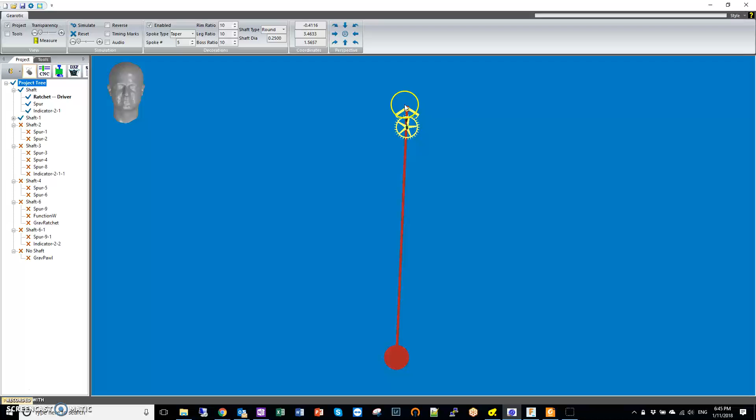So what you see now is the escapement and the pendulum. It's going to be a grandfather's clock where it goes tick, tack, tick, tack, like every second. It's going to make a tick or a tack.

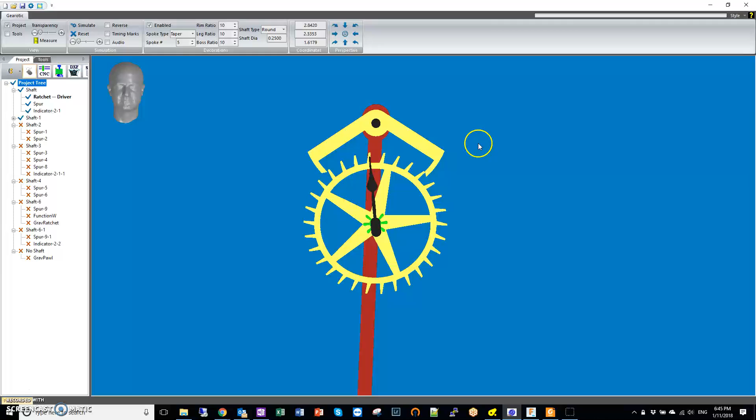So what makes the tick or the tack is when the pendulum swings, it's this escapement here. I'm going to do a little bit of a simulation. Here's the tick, and a little bit later, you're going to see the tack. As the pendulum swings the other way, here's the tack.

There's something else that needs to be considered here. Of course this would stop unless there was additional energy pushing the pendulum back and forth. What's doing that, I'm going to zoom in right here, is right at this moment. The wheel is actually turning and it's pushing that little lever right there up, and the same thing the other way around. Just at this moment, it's pushing this up, and it's this little push that gives the pendulum back and forth that is actually going to keep the pendulum going.

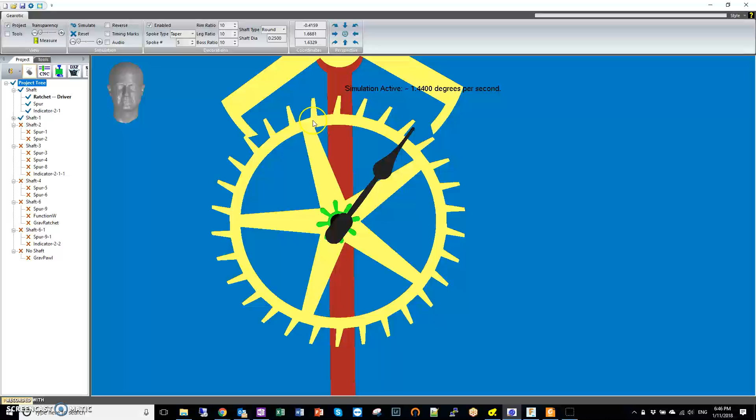What is doing this is going to be a weight somewhere in there, and as the weight is pulling down, it's actually being reduced, but eventually this gear right here, or this ratchet, is actually trying to escape and apply some force to the right. All right, so that's the basic principle, and I'll show you a bit later.

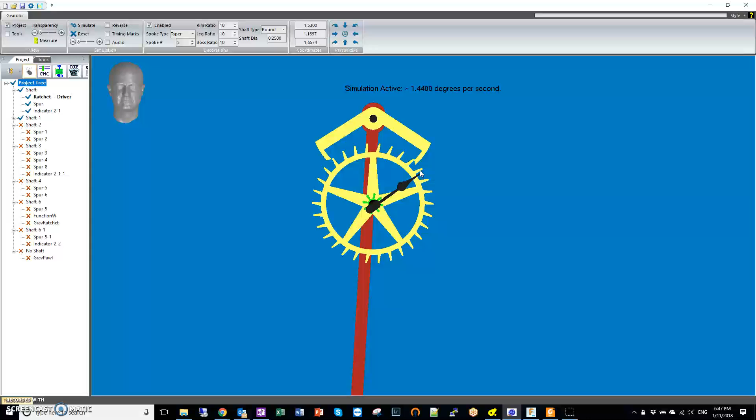So there's nothing new there. Let me show you. So far, what you see here is a tick and a tack every second. The little indicator here is actually moving, that's the second hand, right? So it's going to do a full rotation every 60 seconds.

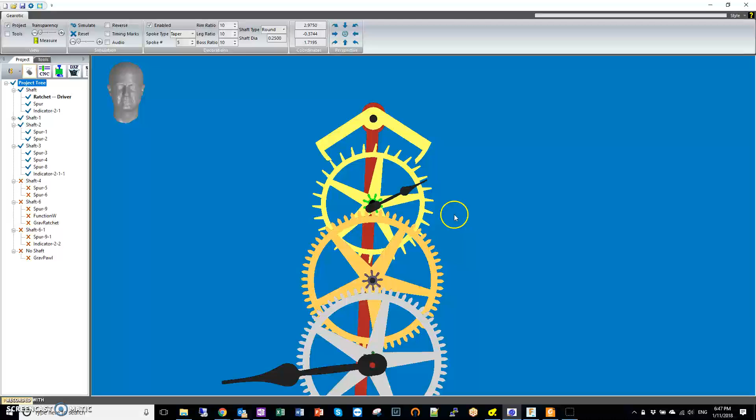Now let me show you how I get the minute hand, and it's basically by doing a reduction with 2 sets of gears, an 864 and an 860 right here, and what you see right there is the minute hand.

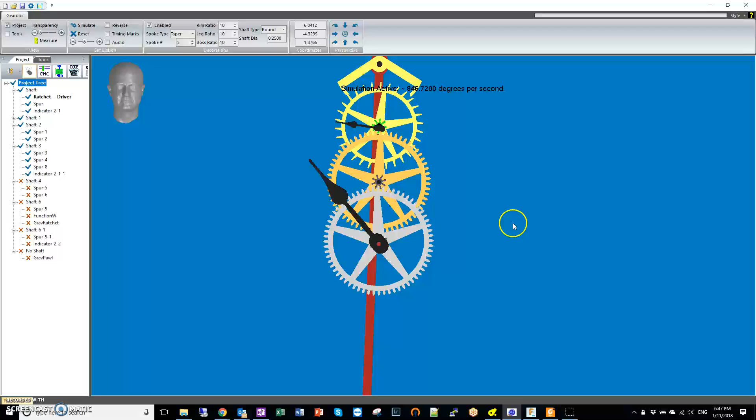So I'm going to accelerate the simulation so that you can see how it's going. I'm going to make it a lot faster. There you go. So there's a minute, 2 minutes, 3 minutes, and as you can see, the minute hand is moving accordingly. Okay, so that's what we see so far.

And how do I get the hour hand? I'm going to stop this. So I'm going to show you that. Not this guy, but this one right here, and this is what you see.

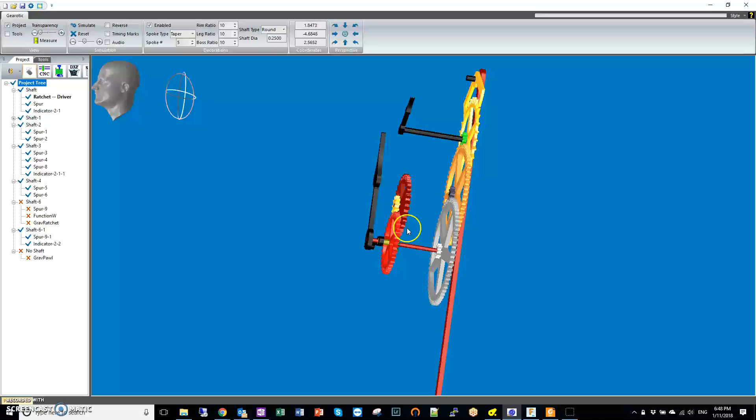Further up front here, you see a set of gears, and these gears are designed to divide this motion by 12. So every 12 rotations of the minute hand, there's going to be 1 rotation of the hour hand.

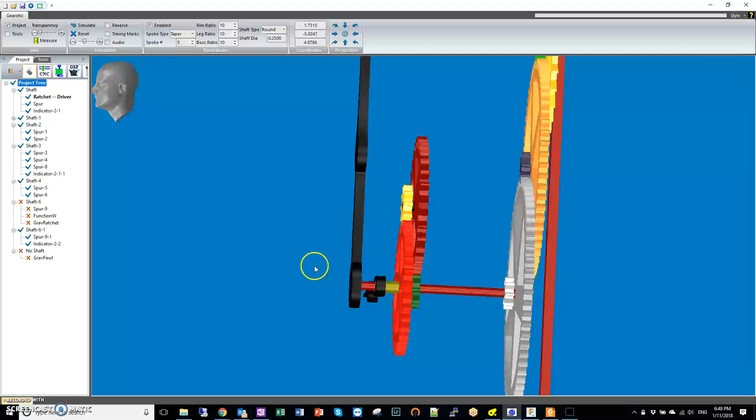One thing that will be challenging when I make this is they are concentric, and you can see that this is the wheel, the gray one here, that's actually driving the red shaft that's moving the minute hand. The minute hand is held on the red shaft, whereas the concentric tube that slides on top of this is going to be tied to this red wheel, and that's going to be driving the hour shaft.

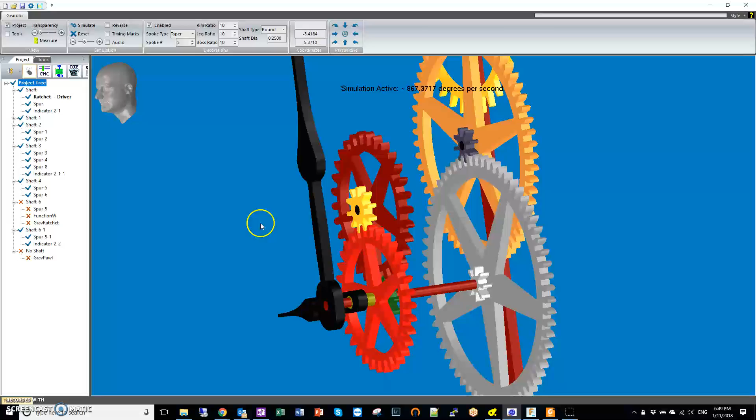So I'm going to show you this. Alright, there you go, and we'll move and accelerate this. There you go, and that's what you see. So the hour hand is moving.

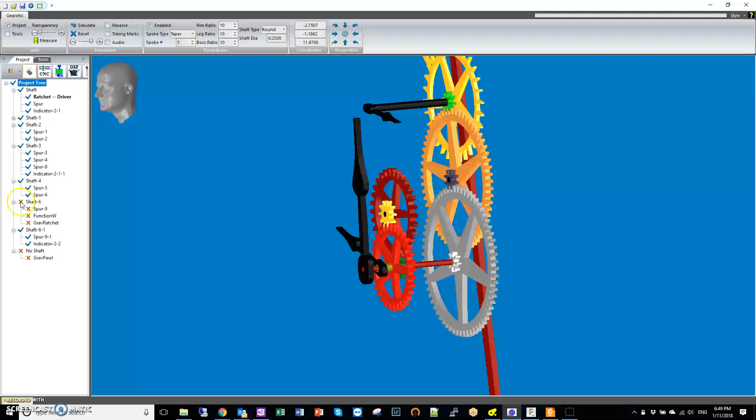So the next step I want to show you is that weight that's going to go down and pull on all these gears, and that's what you're going to see right here. There's an additional wheel, and this wheel here is going to make a turn every 8 hours. I wish it could be 12, but I cannot make a gear any bigger than 5 inches, so I'm going to have to settle for 8.

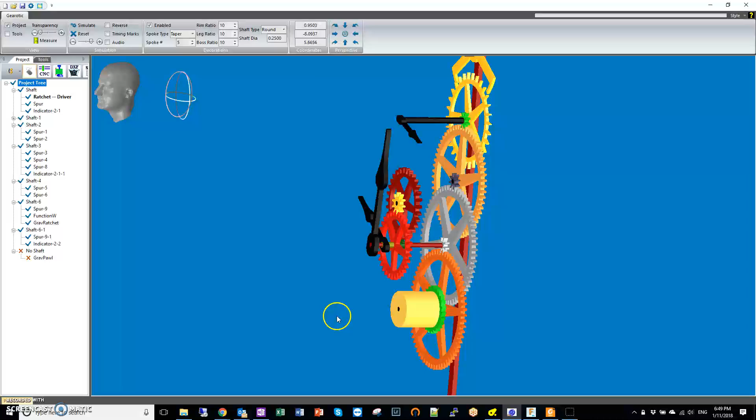Wrapped around the cylinder here is going to be a string with a weight, and that weight is going to be pulling down, and it's that pull-down that actually activates and generates the energy. It's a ratchet system, designed so that you can wind it back up by turning this cylinder, using a key.

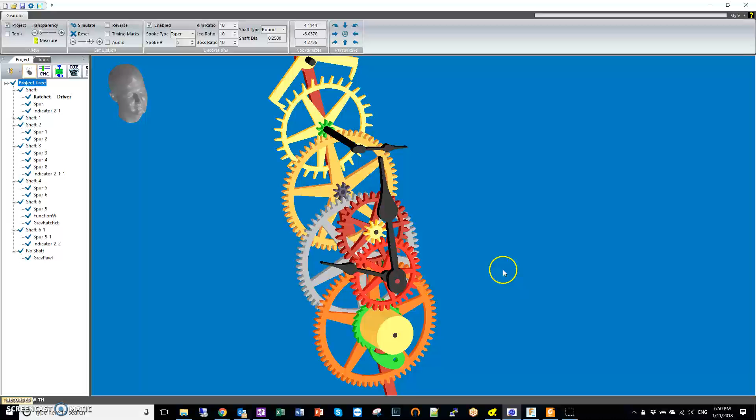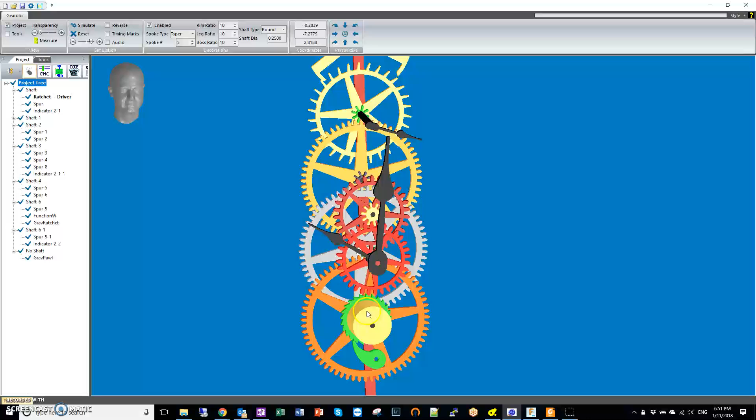37 inches. So the weight is going to be hanging here, and it's going to drop down. When you wind it back up, it's going to have this ratchet, and there'll be a little spring attached here, and the ratchet is actually going to be attached to that spoke right there. So that's the counterweight system right there.

There was one additional feature — so far everything's pretty standard. The additional feature I couldn't figure out how to do just dawned on me: how am I going to do this? Right now, if I try to adjust the time and force-turn the minute hand right here, and I try to turn it, well, I'd be breaking down the gears.

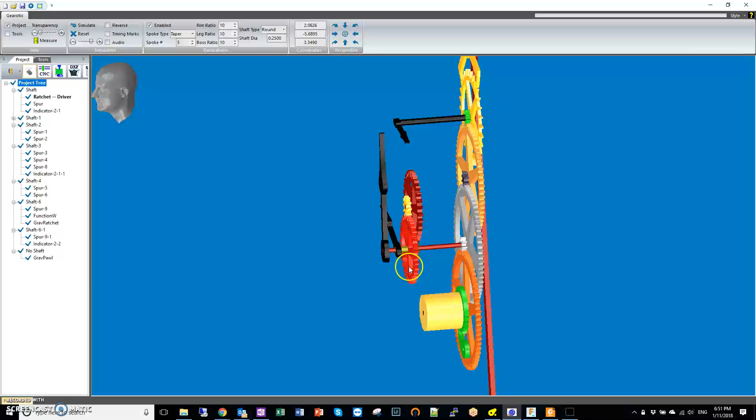The gears are not going to want to turn if I try to push this. So what I was looking at is, how can I make it like a standard grandfather's clock, where you turn the minute wheel and it just turns and actually activates the hour hand as well. So how am I going to adjust the time?

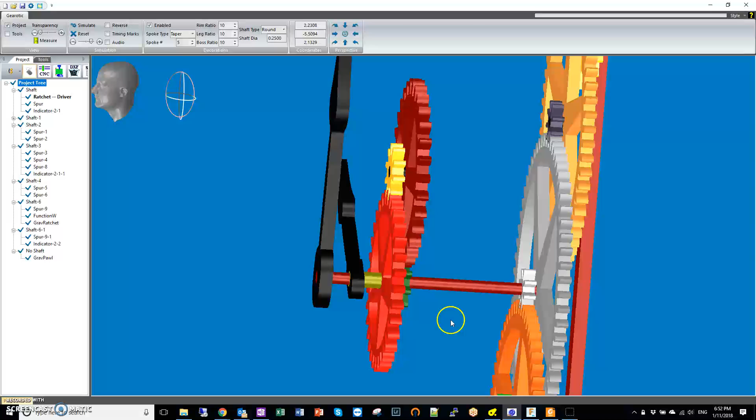I figured that I needed a clutch mechanism or something, where if I turned this it would activate all these gears right here, but not the back gears that are actually driving this shaft right there. So I figured I needed some kind of clutch somewhere along this shaft, so that I could disconnect this shaft — if you want, the motion works in the front versus all the gears in the back — so that I could actually force this.

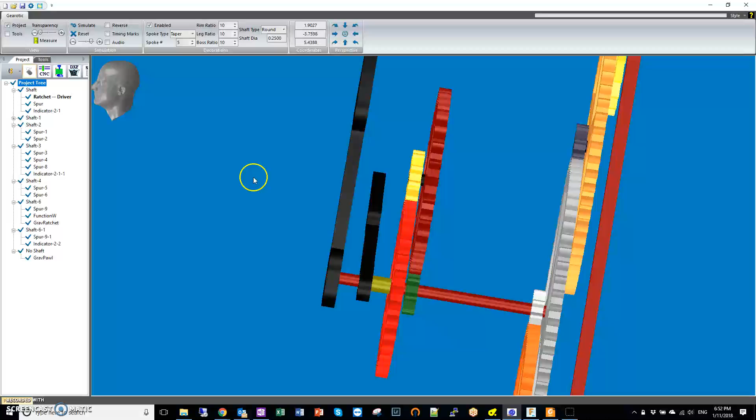So I figured, how am I going to make a clutch here? That's the next step I'm going to show you. So I went to Fusion 360 — actually did it in the shower this morning — and went to Fusion 360 and drew it, and it seems that it's going to work.

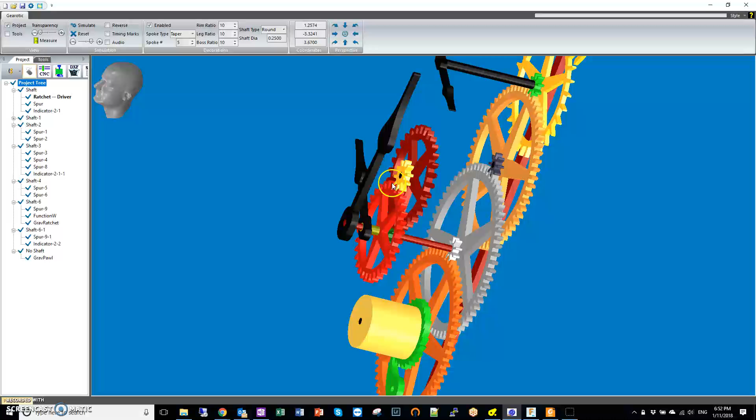Let me go back here. What I'm not showing is, of course, there's going to be a back plate holding all the pinions and the shafts, and there's going to be a front plate, right here. These gears are going to be in front of the front plate. The pendulum's going to be behind the back plate, actually.

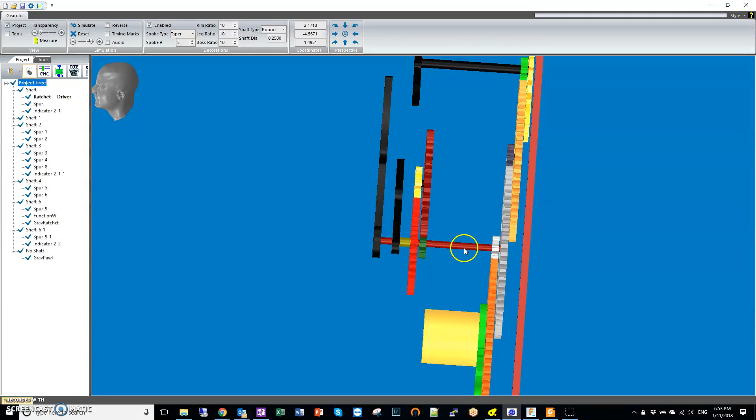So if I go to Fusion 360, here's the back plate, here's the front plate, and I'm showing the minute hand here. Let's go back. So what I'm showing is the back plate, front plate, and this red minute hand shaft. Here's the minute hand, and what I'm going to concentrate on is how I'm going to do the disconnect, or the clutch, here.

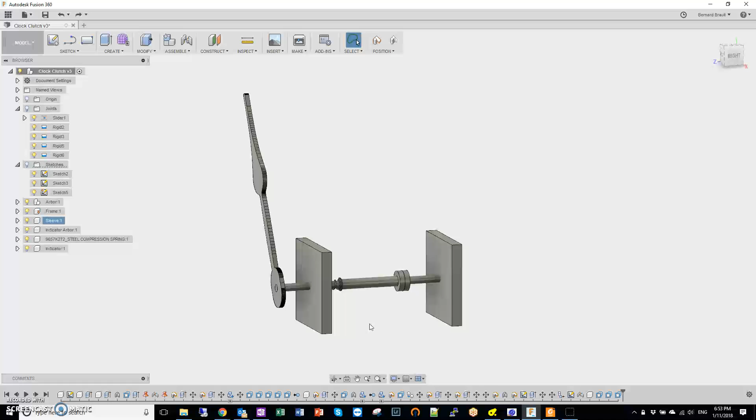So here it is. The front plate is here, the back plate is right there, and this here is the minute hand, so it goes around over an hour.

If you notice here, I have 2 discs right there, and here's the clutch. These 2 discs should be able to slip if I apply enough force right there, and it will decouple the shaft in the back from the shaft in the front. I'm actually going to take this component right there and make it a little more transparent so you can see what I'm talking about.

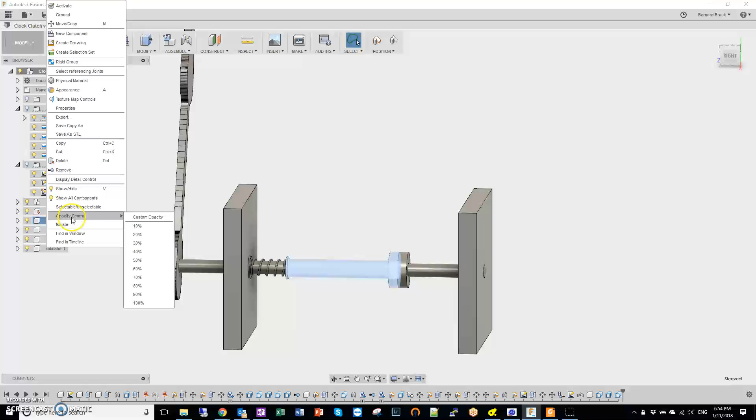I'm going to make it sort of 60% transparent. There you go. As you can see through transparency, the minute hand shaft is in fact split in 2, and it's held inside of a sleeve. The sleeve is attached to the front shaft, and it's also attached to this disc here, and the disc will slip against this one, and that's going to be the clutch.

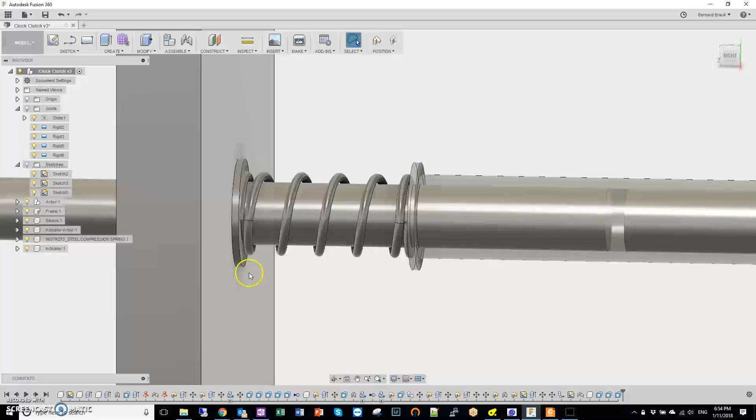What's going to force a little bit of pressure on the clutch is a spring that I mounted right here in the front between these two washers right there. I think I may have to figure out a way, because I'm not sure how much pressure it needs. As opposed to trying different springs, and I don't want to redesign it, I might actually have an adjustable thread here to move the washer in and out. I haven't figured this one out.

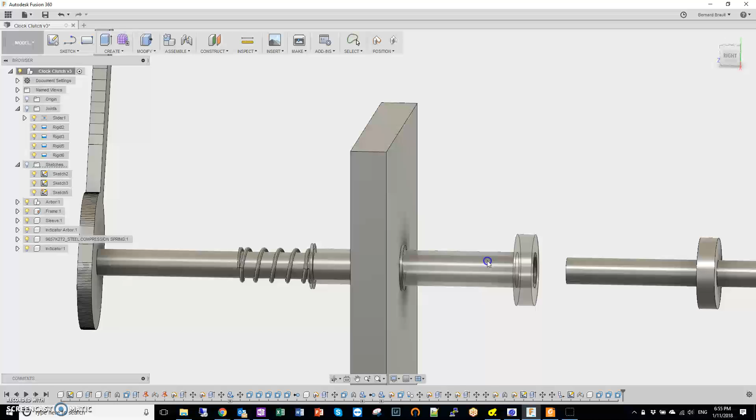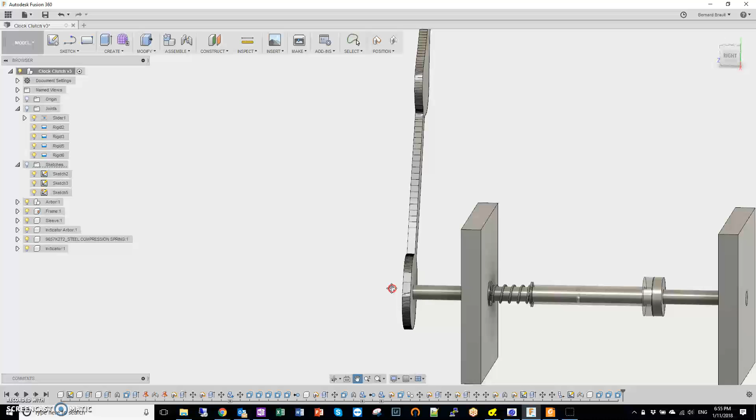Let me show you what happens if I just move out this part right here. As you can see, while the spring is sort of coming out, it wouldn't be doing this for real. But here's the sleeve, and it goes across above the shaft, and eventually will make contact, and that contact should stay there. There's another big advantage to that: it's going to keep this shaft here, or this pinion, needs to be kept back there. There's nothing in front of the minute hand that's holding this back.

So either I was going to figure something else out, but the spring serves two purposes. It actually keeps this shaft in the front towards the back, and it also serves the purpose of creating this clutch mechanism right there.

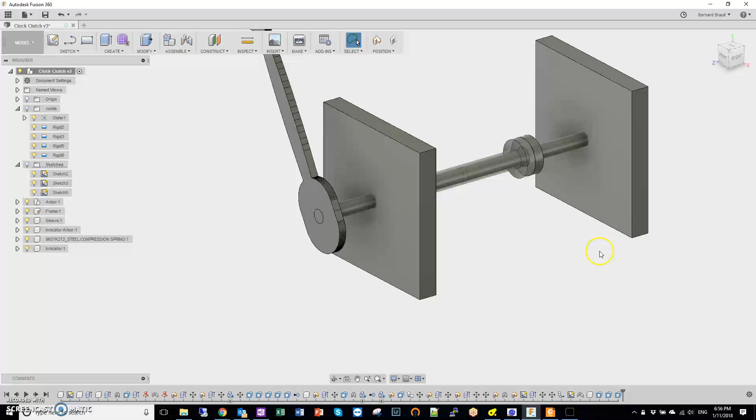So when I actually force turn the minute hand in the front, let me show you this. What's going to happen is that it will make the clutch slip, and only the front shaft right here will turn.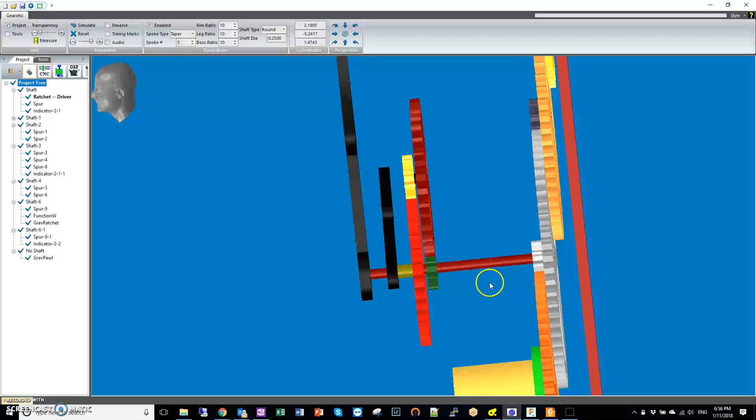If I go back to this design, that means that, keep in mind, the front plate will be right here somewhere, and this is all the front portion. What I'm showing in this section here is where the clutch is going to be. So I think that should work.

I may have to figure out how I'm going to make this variable length, so that I want to be able to adjust the amount of pressure, because one thing I don't like about this design is...

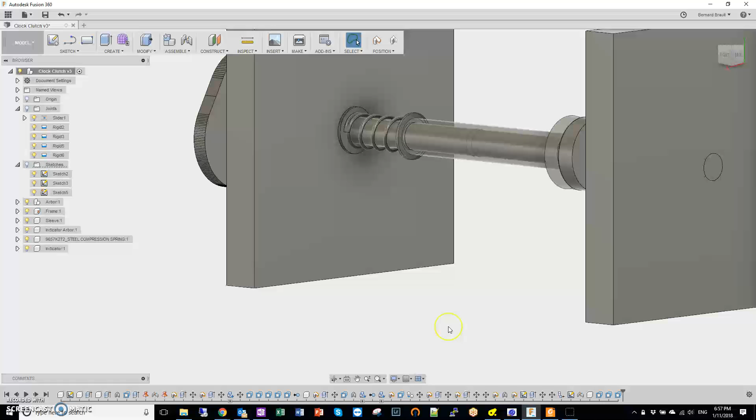When the clutch is engaged, this whole thing will act as one shaft. It's going to act like a solid piece, and this is going to turn, and it'll make the sleeve turn, make the spring turn, and of course what's going to happen is that there will be quite a bit of the washer here turning against the plate right there, and it's going to be probably a stainless steel washer against a brass plate, so it's going to cause quite a bit of friction right there when that turns.

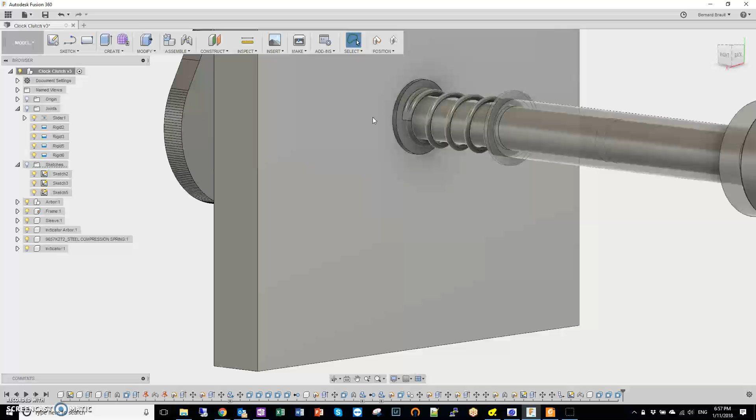Of course the friction there has got to be less than the friction on the discs right here, and it should be if it's smaller. I assume that the size of this may have to be a little bit bigger. But that's one thing about the design that I'm not so sure about: the friction on the washer right there. So there you have it, a little clutch.

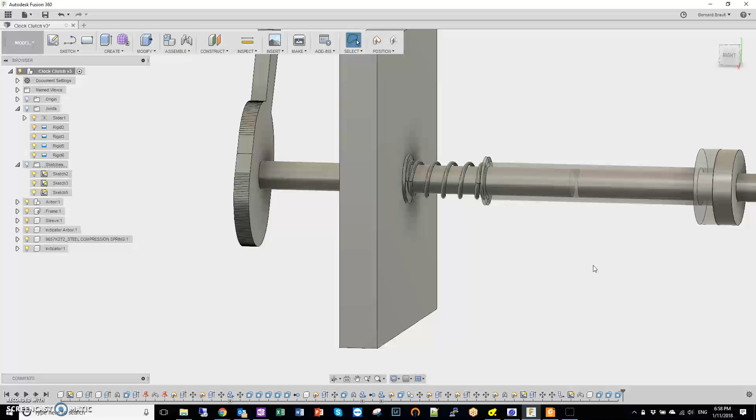I don't know, it's not final. I'm going to have to see if this is the design I'm going to keep, and that's where we are.